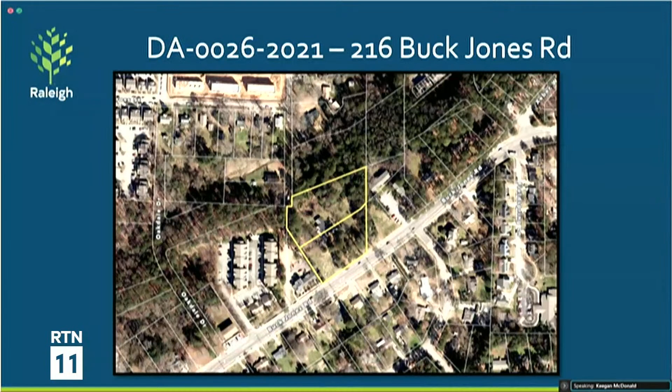This image shows the grading that will occur on the site and the exact location of where the request is being made. That red bubble is highlighting where the cross access would otherwise be required. The applicant has stated that significant grading will need to be done on the site at or near the property line. While that grading does not currently exempt them from cross access, at the end of the grading process it will be of a significant slope such to make cross access somewhat infeasible or impractical to that neighboring property, in addition to it being vacant.

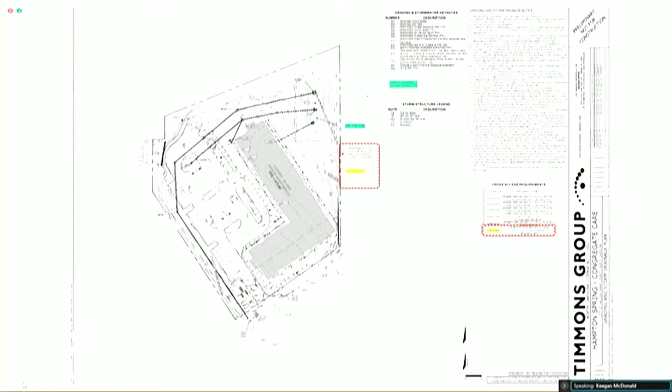I did want to note that there are a number of other properties that the subject property abuts, and each of those has a specific exemption from cross access built into the code. Those are objective exemptions that can be evaluated by staff, and they've worked closely with staff to ensure that cross access does not need to be provided to those properties where an exemption is in place. I believe they have a slide walking through each of those in case you have a question. This is just a zoomed-in version, again showing the location of where that cross access would otherwise be, and its proximity to the stormwater retention device to the northeast.

That concludes my presentation. I did want to put up the standards for the group's benefit in terms of what needs to be satisfied in order to grant the design alternate. First, that it's consistent with the intent of the section, does not increase congestion or safety issues, and does not conflict with an approved or built roadway project. Last, that it is deemed reasonable due to one of the following four reasons: either the existing physical environment creates an inability to comply, it would not meaningfully improve connectivity, it's not compatible with adjacent uses, or the burden of compliance is not reasonable given the size of the site or intensity of the development.

At this point, I'm just going to turn it over to Kevin in case he has any other commentary he'd like to add on this specific case.

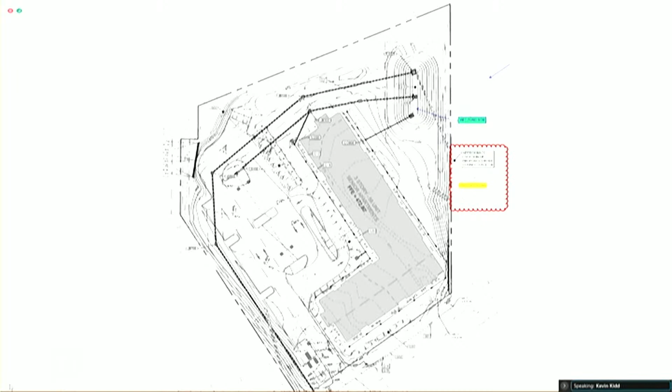Thanks, Keegan. Not much, I think you hit everything pretty well. The one thing I would add is that there is an existing shared drive that does skirt the subject property. The attorney, the developer, and the engineer are well aware, and it's on their plans. If you look at the upper left-hand corner of your screen, you'll see a driveway apron. A little further down, you'll see where they've pulled the retaining wall back - those kinds of things to take into account, so as not to inhibit access. Also of note, to the north is a future extension of roadway for the city going forward, so no access was needed there.

Keegan noted all those points. It is of note that there was an administrative site review to the east, the adjacent parcel; however, that has not come in. I'm not sure if that's been pulled or whatever, but staff did work with the developer and their representatives and agreed on all the exemptions. I'm here for any further questions should they arise.

Good afternoon. I'm Isabel Maddox. Can you hear me? Yes, we can hear you. I'm here today representing Evergreen Construction Company, and on the line today is Evergreen Vice President Tim Morgan.

Also, project engineer Patrick Barbeau of the Timmons Group is on the WebEx today and will be available for questions. If we go to the next slide, please. The subject property fronts on Buck Jones Road and backs up to the future Western Boulevard expansion. You can see the area where the future expansion of Western is envisioned. Evergreen is proposing 56 affordable senior apartments on this site, and we are requesting a design alternate to the requirement that cross access be provided to abutting sites.

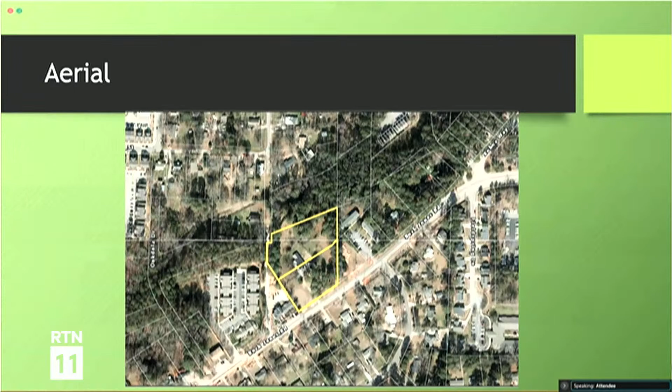Next slide, please. As both Keegan and Kevin said, we have gone through and do have exemptions to all of the properties. There are 3 to the west, 1 to the north, and 2 properties to the east. So 5 of those 6 properties we have exemptions on.

We have steep slope conditions to the west. We have the exemption for abutting a controlled access highway for the future Western Boulevard to the north. And to the northeast, we have an exemption because we abut townhouses. So the east line of this property, there's 2 properties abutting. The top half has an exemption, the bottom half does not.

And that is what we're here for today. It's a small vacant parcel. We had initially sought an exemption there because of the steep slopes. But the steep slopes, as Keegan mentioned, don't really exist on the front end, but there will need to be significant grading to get this site flat, so that we will have a steep slope condition on the back end, but that does not qualify for an exemption.

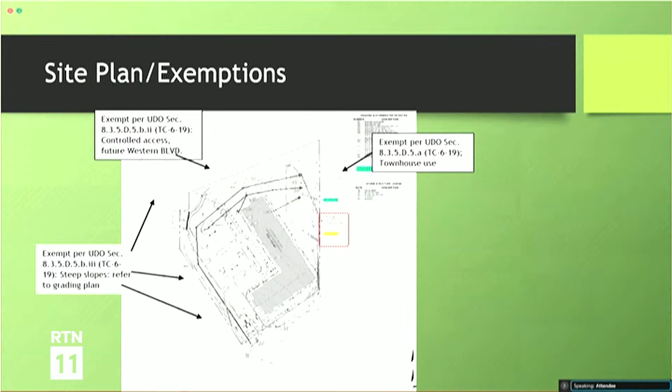So you might ask, why would we grade it in a way that would create a steep slope that didn't exist today? Next slide, please. The answer is that the goal is to get this site as flat as possible, particularly to the rear of the proposed building where an outdoor amenity area is proposed in the back.

This is, as we said, a senior affordable housing apartment building, and we want the back yard area to be flat, so it will allow many activities that might go on in an outdoor amenity area - gathering, seating, recreational activities. Having a relatively flat site is important for any constituents, but particularly so for senior residents.

The UDO really does not acknowledge that there's an exemption available when the steep slopes are created after the grading. But they will, we believe, reach a slope in excess of 25%, which is the standard for an exemption, pre-grading. We do think that the design alternate request is reasonable.

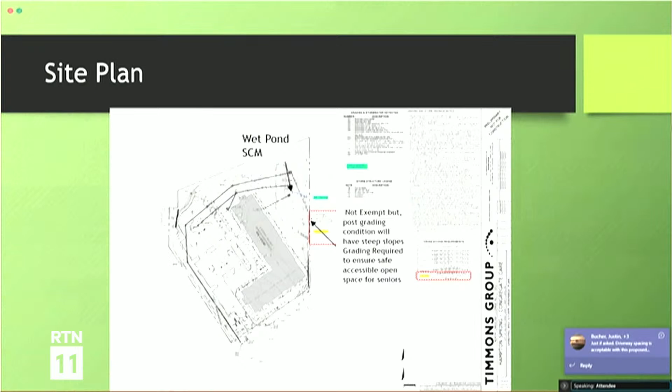If you go to the next slide, I'll go to the findings. So the first standard is that it's consistent with the intent of the ordinances. The ordinance here is to provide safe, efficient, convenient access and to reduce traffic congestion. But we say that following necessary grading, topographic challenges will make cross-access difficult.

The abutting site is vacant and cross-access would not result in any practical cross-access. Finally, the development proposes affordable senior housing, which increases the challenges of accessibility and security between the sites. So we feel that if we were to create the cross-access after construction, it would not really be safe and efficient access. It would be probably dangerous and impractical.

Second standard is the approved design alternate does not increase congestion or compromise safety. Here, we think the design alternate will increase the safety for the senior residents, and it will not increase congestion as the adjoining site is vacant.

I also had a conversation today with George Lennon, the owner of the adjoining site, and he was going to try to be on the call, but had a meeting. He didn't think he would be able to get on, and he did say please express my support for this request.

He had tried to do a townhouse development there. Had he done that, we would have an exemption, but he was not able to get it approved at this point. I'm not sure whether that's still an ongoing project or not.

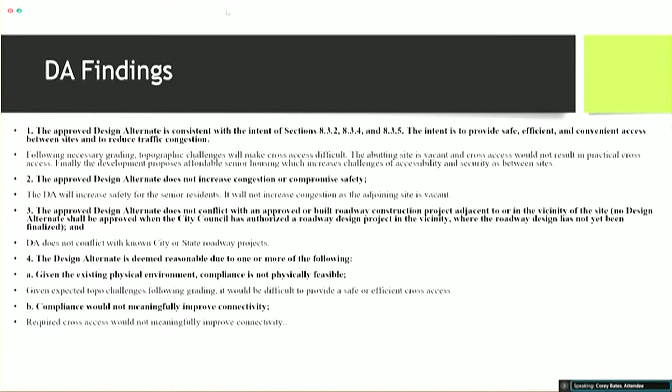Okay, well I'm happy to swear you in if you'd like to add any comments. If you don't have anything else at this time... I'll be happy to be sworn. Let me go ahead and swear you in. Mr. Lynn, do you swear or affirm that the testimony you'll provide will be the truth, the whole truth, and nothing but the truth? I do. Thank you.

Do you have anything additional at this time to add to Ms. Maddox's summary? We agree with Ms. Maddox's summary of the requirements being met. We own 200 Buck Jones Road, which is 14 apartment units with parking, and the adjacent piece at 214 Buck Jones Road, which is a triangle-shaped undeveloped vacant lot. We had considered building 4 townhomes on the site but have not pursued that project. So if it needs cross access, it has access to 200 Buck Jones through that parking lot. I see no reason that Evergreen's proposal should not be accepted by the commission.

Thank you, I appreciate that. Also, the 214 lot has street access, as you'll note on the map at the bottom left, and there's access through 200 through that parking lot. So I see no real convenience to be gained by any party by denial of this request by Evergreen. And Evergreen does good work. My son-in-law's mother was in one of their properties off Shelley Road, liked it very much, and felt it was a very well-run organization. We believe this will be an asset to the neighborhood and to the city.

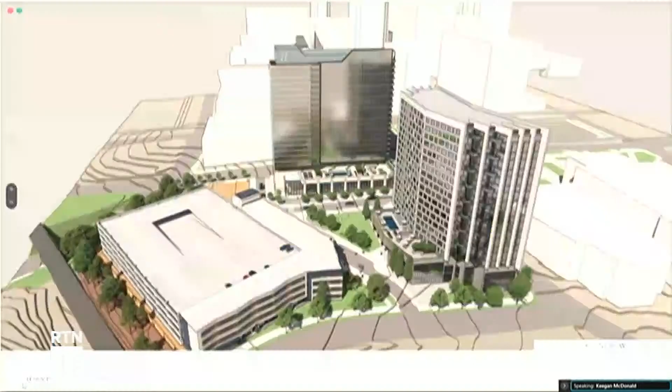Okay, hopefully everyone can see this presentation. So again, this is an administrative alternate design request related to 700 South Salisbury Street. Just a little bit of background about the broader project: located just south of the core downtown area, it's a multi-building development, as you can see from this rendering. It'll include two 20-story mixed-use buildings and also a parking structure with a 4-story residential component wrapped around, totaling about 587 apartments. There'll also be ample commercial space on the ground levels of these buildings, and then an amenity area in the center of the site and along a few of the perimeters of the buildings.

So the first component of this request is related to build-to, coming from section 348C2, related to the urban general frontage. It does require a 70% build-to along a primary street, and there are two buildings here that are part of this build-to request.

The first is Tower 2 on Lot 2, which I'll spotlight in a moment, one of the mixed-use buildings. That building will only occupy about 33% of the primary street frontage along Kindley rather than 70%. Also, the apartment building will only occupy about 49% of the primary street frontage along Kindley Street rather than the required 70%.

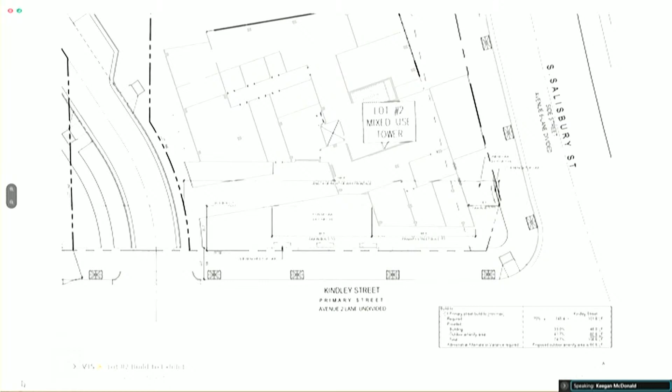Lot 3 is the apartment, and this is the same scenario: about 50% will be occupied by the building, and roughly 20% by outdoor amenity area. I wanted to show these images again because they do a decent job of showing where that outdoor amenity space will be located, along Kindley at the bottom of the picture. This is the intersection of Salisbury and Kindley, where you can see the planted area at the street, and as you move along Kindley, that outdoor amenity area fronts the south tower and the apartment building.

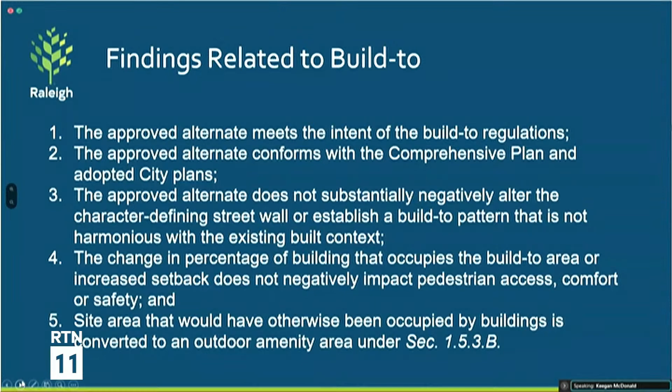These are the findings related to the build-to: one, that it meets the intent of the build-to regulations; two, that it conforms with the comp plan and adopted policies; three, that it does not substantially negatively alter the character-defining street wall or establish a build-to pattern that is not harmonious with the existing built context; four, the change in percentage of building occupying the build-to area or increased setback does not negatively impact pedestrian access, comfort, or safety; and five, the key component that area otherwise occupied by the building be converted to outdoor amenity area, which the applicant has shown. That covers the build-to request.

I'll proceed, if the commission is okay with that, through the building massing request. There are a lot of images in this section, so I'll move through them quickly since the applicant will go into more detail. The building massing request relates to two of the buildings. The requirements state there must be a 15-foot setback between the 13th and 20th stories, and between the 3rd and 7th stories, for buildings between 13 and 20 stories in height.

This is relevant to two of the buildings, the two towers. The north tower will not have any setback on the facade facing South Street, but does have other articulation and a material change, which I'll note on the exhibits coming up. The South Tower has material changes, a 3-foot step back, and a 25-foot setback from the street that they are proposing as an alternative. Tower 1, fronting South Street, is the first part of this request; Tower 2, facing Salisbury Street, is the second part.

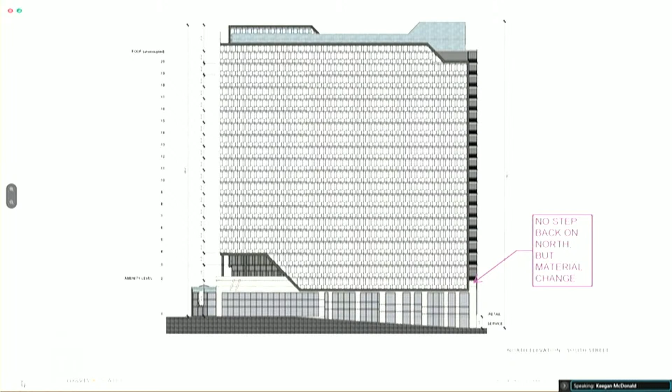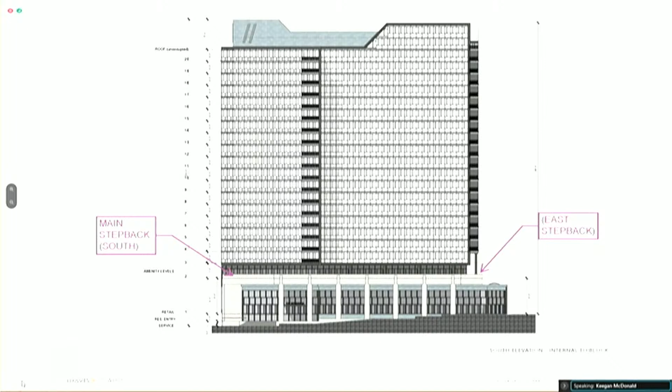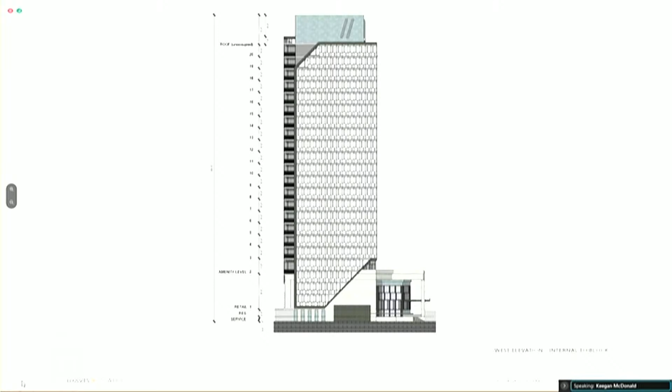These images show the step backs that exist: one on the east side, already seen along Salisbury, and also what they refer to as the main step back on the south side of the building, internal to the site, away from South Street. This image shows that step back, and another shows it from the reverse side. This is the western elevation, internal to the block, on the side opposite Salisbury, and that elevation shown in three dimensions.

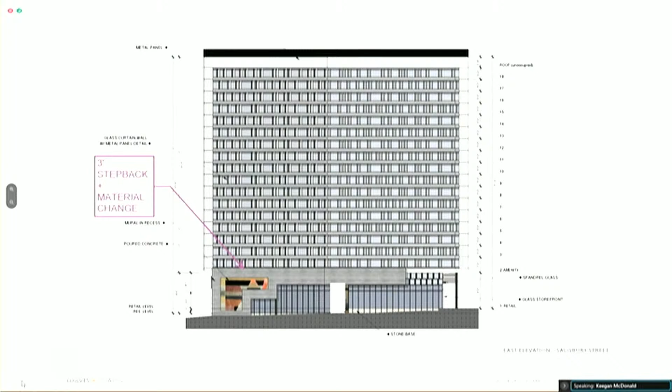This is the elevation along Salisbury Street. There is a 3-foot step back and again a material change. Here's a 3-dimensional look at that specific facade.

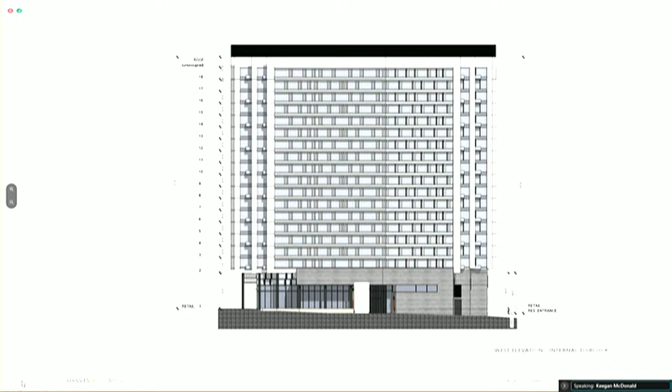Here is the opposite side, internal to the block. Here is the north elevation, also internal to the block. And also the setback, the elevation along Kindley Street.

So this is again an area where they're not proposing a setback or step back, but there is a material change on that elevation as well.

I just wanted to run through those images to show some of the other content that they provided. This is looking south along Salisbury. And this gives an internal view of the amenity space.

Just to orient again, to the left is that north tower, and to the top of the screen is that south tower, with Salisbury Street as the intervening drive between the two towers.

So for building massing, there is a separate set of findings. The first two are very similar to that for building two, that it meets the intent of the regulations and conforms with the comp plan. Three, the alternate uses a change in building materials to mimic a change in wall plane. The most substantial and durable building materials are located at the bottom floors of the building.

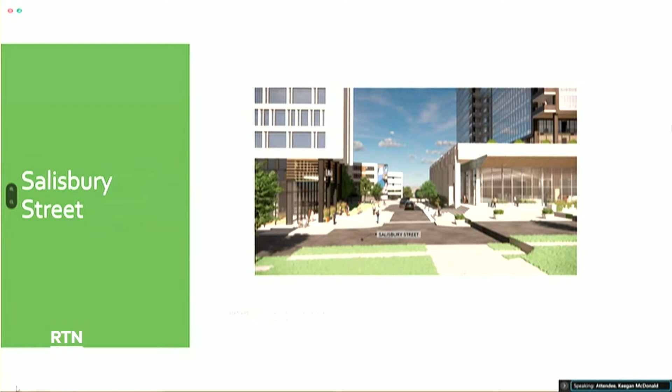Let's see. I think the slides I have for this are a little farther down. I think ours got set up opposite of staff's presentation. Maybe I'll just use this... got me a little off track, I apologize. If we could go to slide 39, this sets a perspective, but if you could just let me know when to stop. I'm sorry, the presentations are combined, so I don't have the exact number. Yeah, I think we could use that one. No, again I apologize, the previous one. That's the Kindley Street one there.

What we've tried to do is incorporate outdoor amenity areas along the public street face that would, one, define it, and also try to pull the pedestrian into the site. We have planted seat walls on both sides, or planted areas behind seat walls, which accommodate some seating. The sidewalk is wide in those areas beyond the required 14 feet.

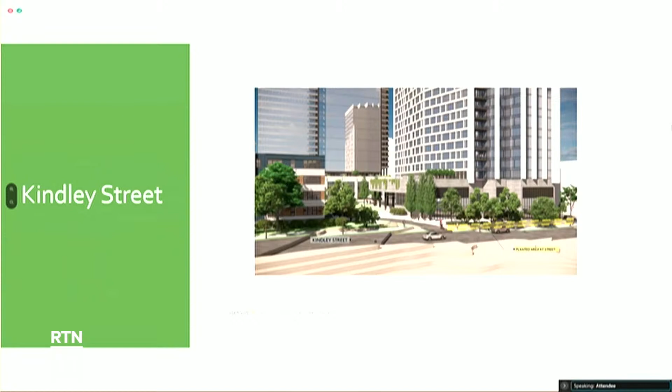And if we can go to a site plan now. Keegan, it might actually be in yours, part of the presentation. There was an aerial color rendering. Yes, that would be helpful. Is this helpful? Or... perfect, is it another slide? No, that'll work out fine.

You can see along that street face how we've incorporated those two outdoor amenity areas. The outdoor amenity area to the west of the access drive, the internal private street, is used to bring the pedestrian into our internal open space that'd be open to the public. We look at it as a gathering area, and Robert will give you more information on that during his presentation. We feel what we've tried to do here can accomplish and meet the five findings, as it defines the street face, adds amenity area for the public, and also serves as an entrance into our internal open space. I don't have any further comments.

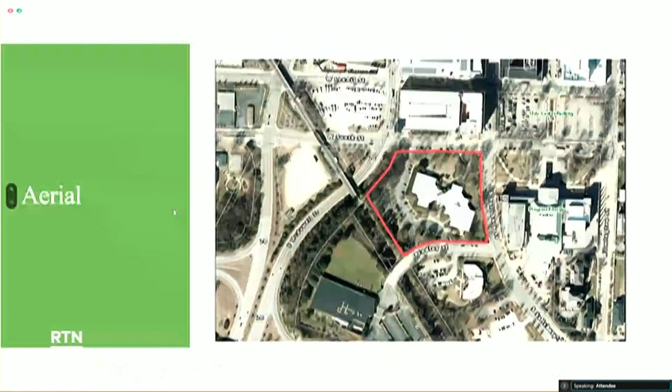Looking at this request with regard to the findings: Tower 2 will only occupy 33% of the primary street frontage along Kindley rather than 70%, and the apartment building, lot 3, will only occupy 49% rather than the required 70%. But in both cases we feel we meet the intent. We have proposed buildings within the build-to range along South Street and Salisbury Street, but the curve along Kindley makes it difficult to achieve a 70% building frontage along that route. However, we think we fill that street frontage with good pedestrian amenities.

Second, it conforms with the comprehensive plan. The policies we'd call out are placemaking, reinforcing the urban pattern, scale and design of new commercial development, pedestrian-friendly development, and ensuring pedestrian comfort and convenience. It does not substantially negatively alter the character-defining street - we believe this is consistent with building orientations along the relevant streets. We're trying to move parking away from the streets, locating the proposed building closer to the roads, and creating urban outdoor space along these streets to improve street character.

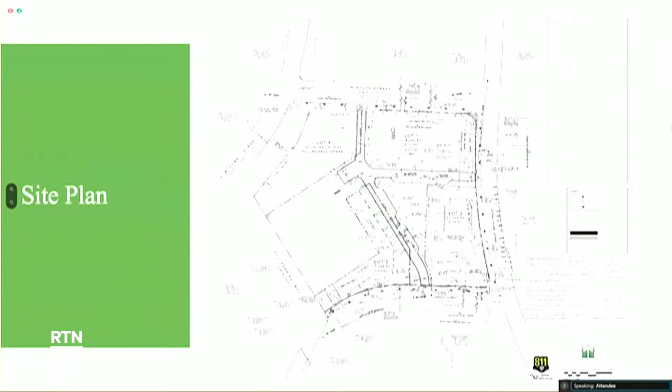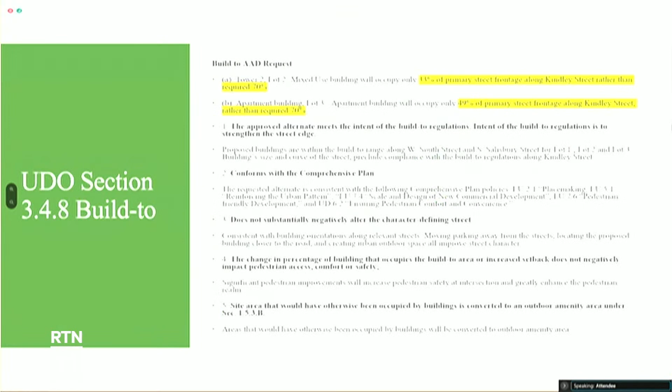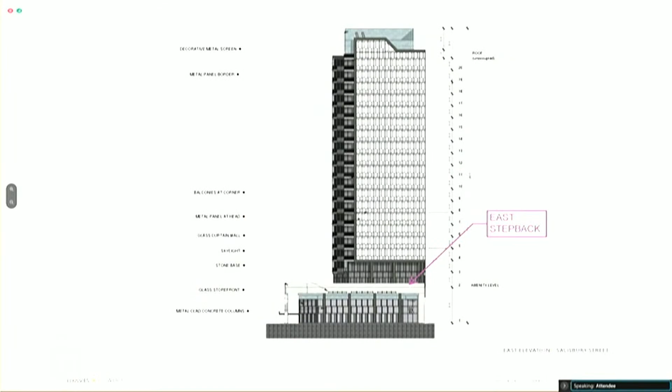Robert? Great, hi, thanks Isabel. I'm not sure where my slides are in this deck. Isabel, do you know where the beginning is? Why don't we go back to the beginning of Keegan's presentation, which had the full deck, and ask him to advance those - I think that's the best thing. There's a slide showing all of downtown with some arrows drawn on it, at the very beginning I think. Okay, great, I do know which slide you're talking about - I did not include that, but I can pull it up if you bear with me. Sorry everyone, just bear with me one moment. While you're doing that, Keegan, let me ask the commission if there's any questions for the applicant on the build-to before we get into the massing.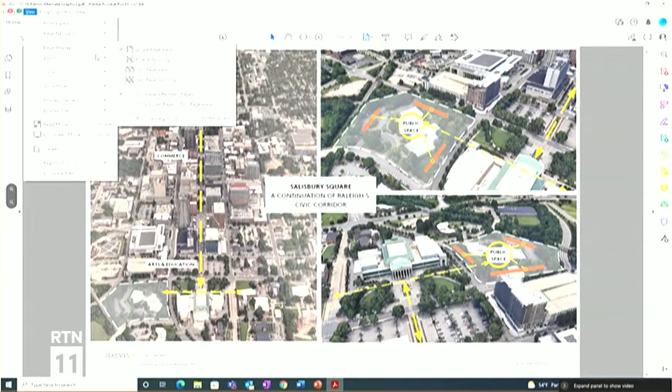Okay, I believe I have that PowerPoint that was being referred to - if that would be helpful I can pull it up now. Are you all seeing this? Yes, okay, cool. Oh, did it go away? No, it's back, okay sorry, just trying to make it full screen for everyone.

Just to reorient here, our site is at this south corner of South and Salisbury, at the edge of the original Christmas plan. The idea is that downtown Raleigh has grown around the big idea of axes connecting institutions and public space. Our project aims to continue and amplify that relationship, bringing more public space to the end of the Fayetteville Street corridor.

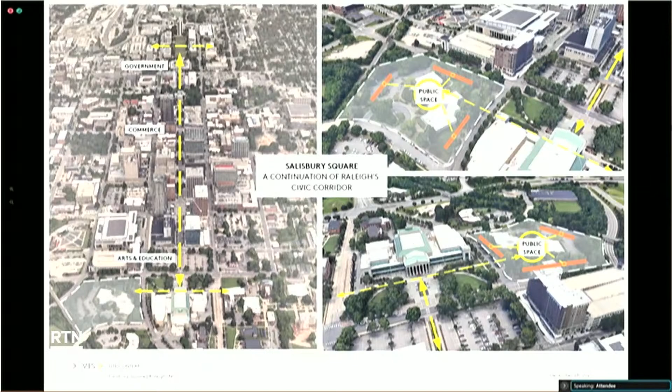The placement and orientation of the buildings makes room for open space, in effect extending the pedestrian experience of the Memorial Auditorium campus. The resulting park is intended to honor the North Carolina Association of Educators, the current owners of the site. This relationship of arts and education informs the architecture - the language of folded paper being the medium of creativity and learning.

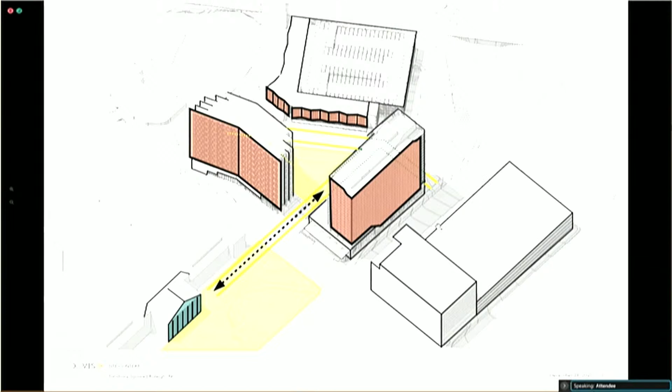So the arrangement of the site is Tower 1 with the primary retail at the ground floor, Tower 2 with secondary retail at the entrance to the site, and workforce housing wrapping the parking deck and facing Kindley Street.

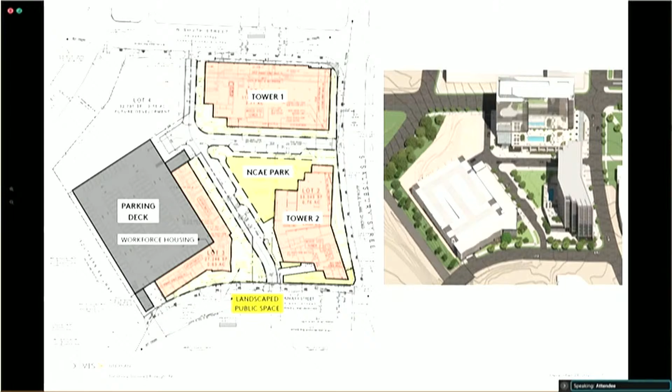This is a view of a rendering of that intended design.

With Tower 1's massing, we have multiple setbacks here on Salisbury. There's a 15-foot setback from the right-of-way, a 15-foot step back from the ground floor, and embedded in that is a 12-foot terrace at the second floor.

That's accentuated by the material change of a base that is this durable masonry material with a regular rhythm to it, which transitions to a folded plane of glass above, and then that is topped by a metal panel crown.

Other features: a 16-foot setback step back at the crown, and a 15-foot balcony slot at the corners. You can see that here off to the right and also off to the left.

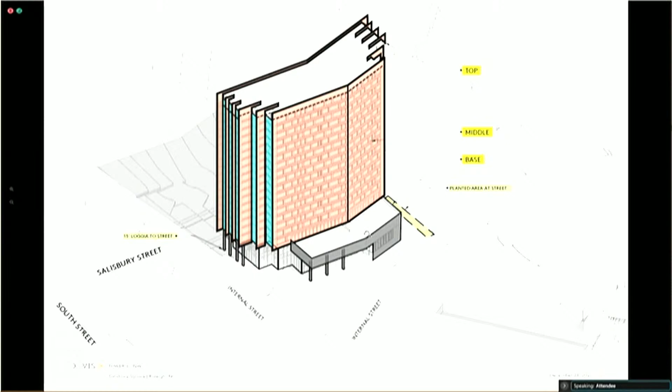And finally, the southwest axon. Again, the same logic of having a major step back here, looking out onto the park.

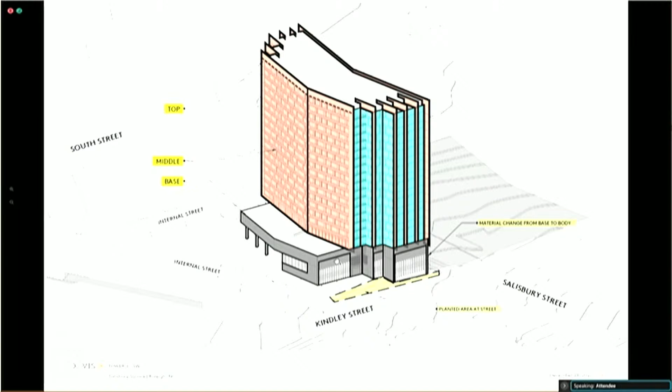So these renderings have some marks illustrating some of the setbacks and step backs and other moves that I've described. As you can see, again, 12-foot terrace, a 15-foot setback from the right-of-way, and a 15-foot step back from the ground floor up to this upper level.

For Tower 2, you could see past that, again, that sort of crown that I mentioned, and the sort of tripartite composition.

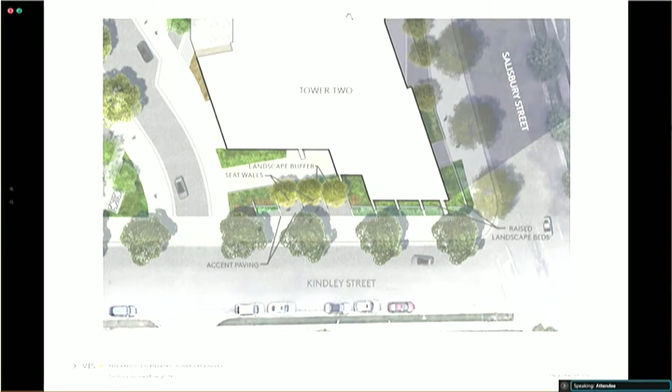Keegan, if you can go to slide 12, which goes through the findings, you may have the findings listed in your materials as well. I just wanted to go through those. I can read through them if we don't have them up on the screen.

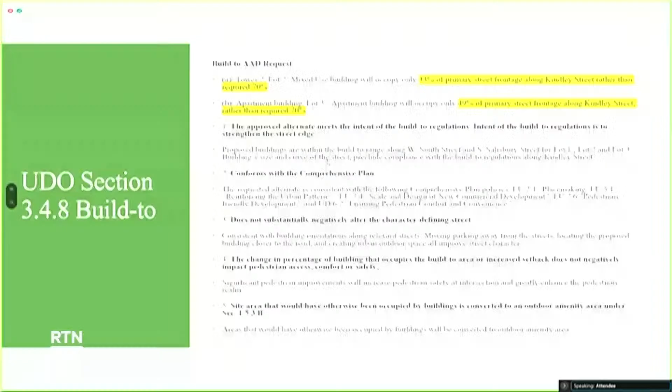The first finding is that the building meets the intent of the ordinance. The intent is to manage the impact of tall buildings located close to the street, which the build-tos require, yet we want to manage the impacts. I think we've done a great job managing those impacts, as Mr. Cox and staff have confirmed. This finding has been satisfied via multiple setbacks, step backs, pedestrian areas, and material changes, and we've gone through those in pretty good detail.

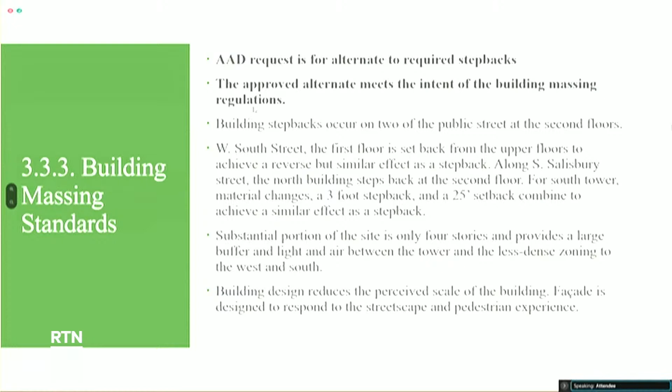The second finding is whether the requested alternate addresses the goals and policies of the comp plan. Staff confirmed that in its staff report, and I'll run through the policies we believe we conform to: placemaking, compact development, reinforcing the urban pattern, pedestrian-friendly development, integration of travel modes, bicycle and pedestrian mobility, sidewalk requirements, pedestrian and bicycle network connections, surface parking alternatives, mixed-use redevelopment, building orientation, activating the street, improving streetscape design, and management of sidewalk. I think we've hit a lot of those policies very well.

The third finding is that if the administrative alternate uses a change in building materials to mimic a change in wall plane, the most substantial and durable material should be located on the bottom floors. In this case, Mr. Cox has testified about the masonry base for Tower 1 and the concrete base for Tower 2, conforming to that finding.

The fourth finding is that if the administrative alternate proposes a setback in lieu of a step back, the resulting open space includes public areas such as seating, outdoor dining, or landscaping. We don't have the exact step backs called out in the UDO, but we do have some step backs and setbacks, and lots of public areas with seating and dining opportunities and landscaping, as you've seen from the pretty pictures and heard from both of our experts testifying.

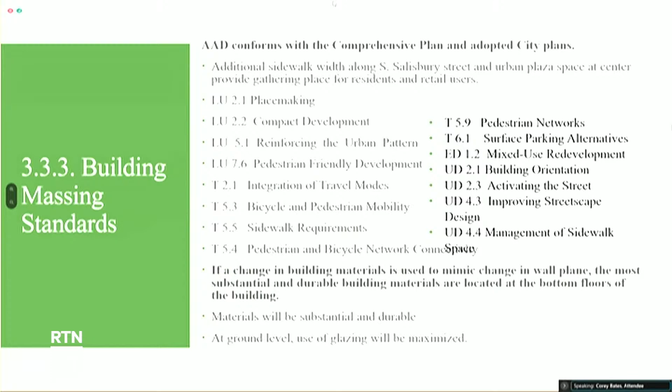Thank you, Ms. Maddox. I understand there are no other applicants signed up to speak for or against, so I'll go ahead and open it for questions you have at this time for either the building massing or the build-to. Questions for the applicant? I got a question.

Those last couple of landscape renderings that we saw were a good bit more detailed on the amenity areas, and in a couple cases a little bit different than the other plans and what was submitted. Are any elements of those more detailed plans still being adjusted or changed, or is what was presented there baked into the final design?

So yeah, those last couple of slides were the most progressed that we've gotten. It is heading in that direction, and we'll definitely be including the elements that we listed off. So I think that end of the site is looking fairly firm. I'd like to add, those were the slides I was looking for when I was talking about the build-to. So they are the latest generation and higher end design, and that is the direction we're going towards.

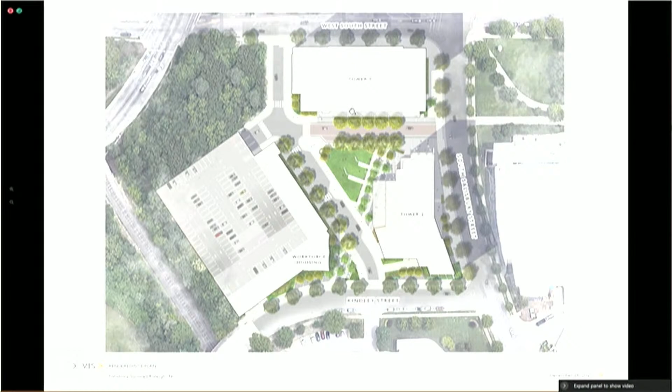Keegan, can you go back to one of the renderings showing the South Street facade? Just looking at the building massing, do we have some heights? I think code is looking for something between the 3rd and 7th floors, on both Salisbury and South Street. What levels are those? I can kind of see it on this South Street. It's like the 2nd to 3rd floor, it's set back at the 3rd floor.

Yep, sorry, what was the question? The question is the UDO talks about step backs between the 3rd and the 7th floor. Oh, for step backs, I'm wondering what level these building materials are, what your base, your middle, top is of course. The base, is that at the 2nd floor level? The gray is concrete that would be at the top of that, at the 2nd floor. So what is orange is the beginning of the 2nd floor.

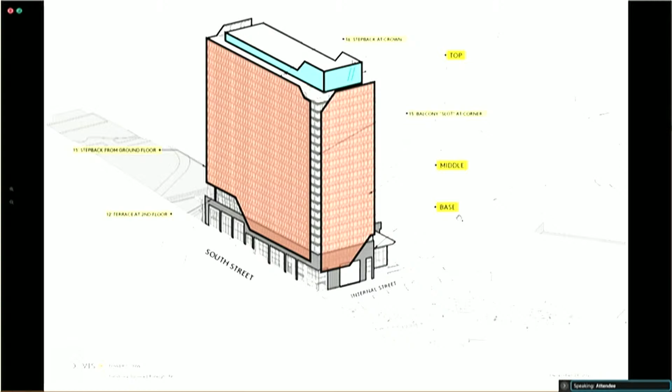Yeah, but they are. We have a lot of open space on the south side, we're essentially casting shadows on ourselves in the morning and across the back of Memorial in the afternoon. One interesting thing we've seen is that because of the size of the buildings, both about 20 stories tall, the step-back notion—coming up 3 stories and stepping back 15 feet—doesn't really change the mass of the building much. The building's quite tall and will cast a pretty long shadow no matter what. So in terms of the UDO goal of getting light and air to the street, what we've got here doesn't really have a material impact compared to what would happen if we were building by right. Correct.

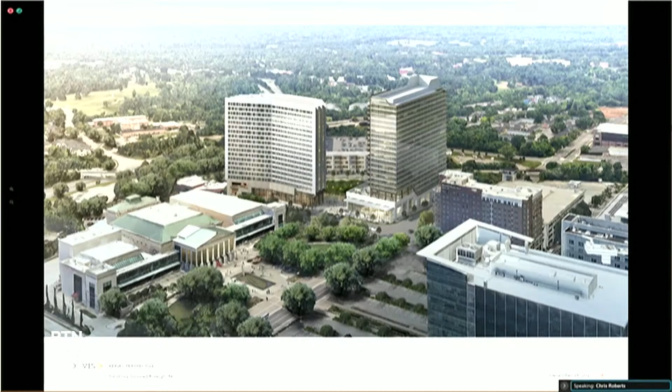Questions from the committee? Yeah, I've got one more. On South Street, I don't think I caught what the setback is from the property line along that face.

So that is hugging the right of way pretty closely there. I can answer that one. Okay, it is pulled back far enough from the right of way.

I believe it's in the range of 4 or 5 feet along South Street. The ground floor doors do not open into the right of way. We're trying to site the building. There's a radial right of way line at the intersection.

So we've been trying to get the building up in the build-tos and get it close to the right of way line when we have this curve, and that's why I think there's some chamfers on the corners of the buildings there. It is approximately 5 feet setback from the South Street right of way, and we are dedicating right of way on South Street approximately 3 to 5 feet, somewhere in that range.

Yeah, and part of that, Ken, is both that orange mass - it's sort of a reverse step back. It pops out, and of course then you can see there the storefront openings along the street are also set back from the masonry face, giving us more room at the sidewalk than we would probably otherwise have.

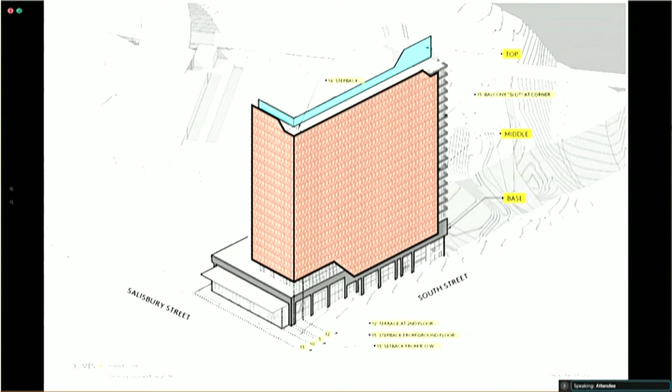Can you go ahead maybe 5 or 6 slides to the rendering where you can look at it from the... Yes, I'm happy to do that. I think it might actually be the presentation that you were running through. Right, give me one moment. Let me stop sharing and then share that screen. Okay, cool, that might help to sort of understand it a little bit better in 3D.

I think that the overall idea is the interplay of this ground floor solid and this masonry base that is interplaying with this glass folded plane, and so the visual relief comes in the dynamism of that sort of mass emerging out of the folded plane.

So you have this significant topography that goes down to about 10 feet from one end of the building to the other. So the building sort of is climbing and soaring up to the top of this corner. So it's a response to that particular condition.

And then I think in terms of scale questions, it's the 12-foot terrace. I think that interplay between that and the sidewalk and the pedestrian improvements along there would greatly make the pedestrian feel comfortable and at ease in that space.

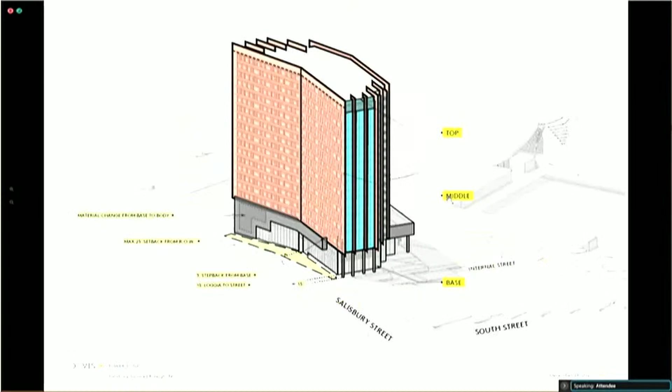There was another rendering in the slide deck looking from that northwest corner back down along South Street. Can you find that one, Keegan? Yeah, that should be the last rendering. Yeah, that's a good one.

I don't know, I'll be curious to hear what my fellow commission members have to say about this corner. Any other questions, comments?

Yeah, I just had kind of the same reaction. I think it looks nice in the renderings and everything, but when you get down to justifying it with the findings, I think it becomes a little difficult, knowing that it's pushing out instead of going in. So I agree with what you said, Chris.

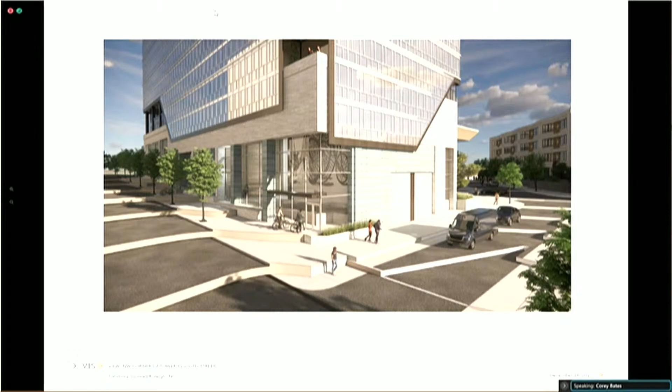Where do we want to start? So we've got a couple things—we've got the build to, which is really for two different buildings, and we also have building massing, which is for two different buildings. So we can kind of break them down.

We could do the build to all as one if people are feeling pretty comfortable. Maybe we start with just the build to—get your overall thoughts, if that's something we all feel comfortable with, or if there's one building that is bothering anybody. Just let me know your thoughts on that.

In my opinion, overall I think they did a really good job incorporating that outdoor space, or outdoor amenity space, for both of the buildings.

Yeah, I appreciate the extra detail on the updated renderings, with a lot of extra elements there to make that more of an amenity space. And yes, Salisbury Street is intuitively the primary street, and all of those streets are curved except for South Street. So I think the build to makes sense.

Yeah, agreed. I think those final site plans that Keegan found answered a lot of the questions I had about what those amenity areas were, to make up the difference for the build to. So I'm in agreement with both of the build to requests for both towers, or both buildings.

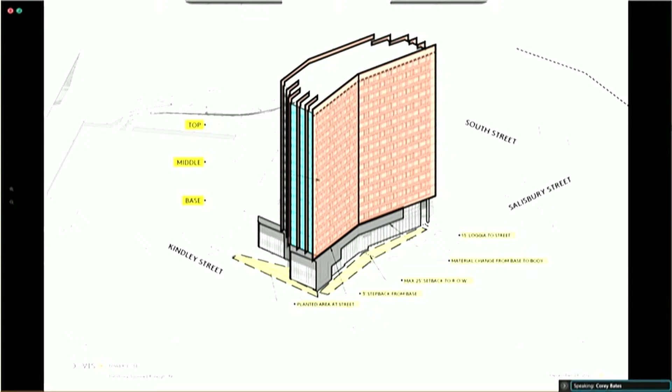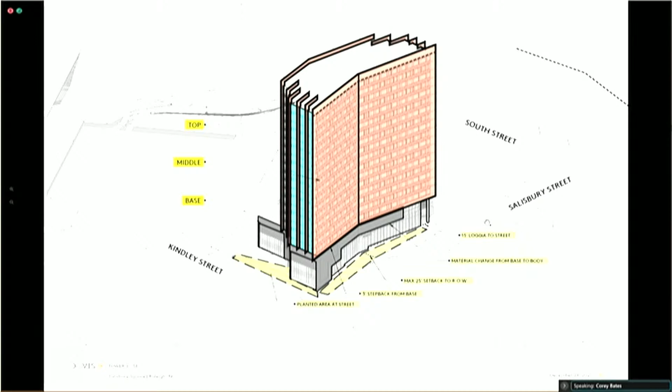Get the findings for... Yes, give me one moment. Let me see if they're in this deck, and if not, I can pull them up.

So the approved alternate and number 2 conform with city plan policies. Justify that. UD 2.1. Mm-hmm, 2.3.

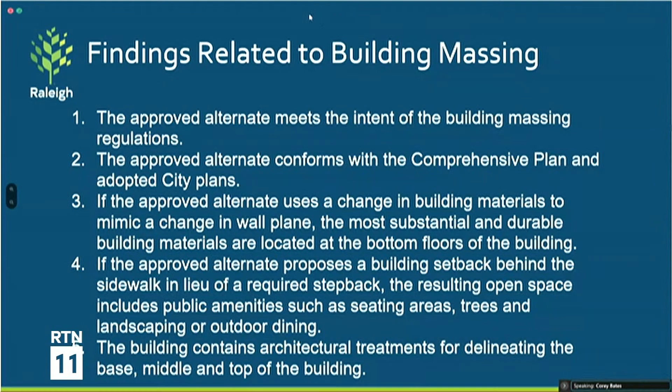Okay, so that just leaves, really, what is that called? Tower 1, I guess, on the South Street side.

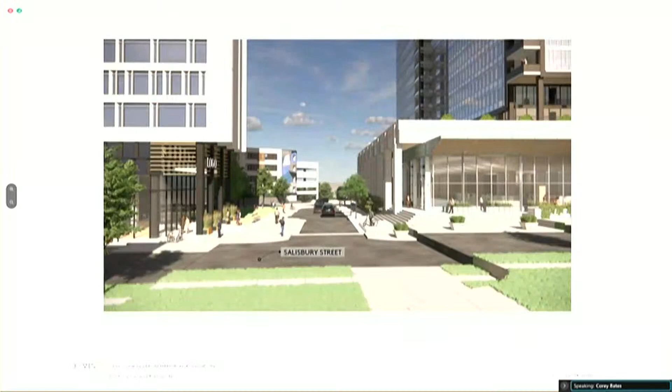Sounds like there's some questions. I don't know if the votes are there quite yet. I would suggest that we hold off till our next regular meeting. It's just my suggestion on that.

Mr. Chair. Yes, ma'am. I think it would be helpful to get any kind of concrete guidance, and I would like Robert Cox's input on this because he's going to have to tweak anything that needs to be changed, which I don't think is a minimal tweak.

Right, and actually, if you don't mind pulling that image back up, that'd be helpful. This is a hard one. This is one of the hardest ones I've had, schematically.

I think it is because it does appear to be so far along, but I think what we're having is just a hard time finding a way to meet the intent. If I could, there was a comment—I apologize, I don't recall who made it—but somebody mentioned that we were able to do it on the south side, but not on the north side.

I think it's important to keep in mind that the reason it's on the south side is because we could, right? The south side is where the swimming pool is, it's where the amenity deck is for the residents and those kinds of things.

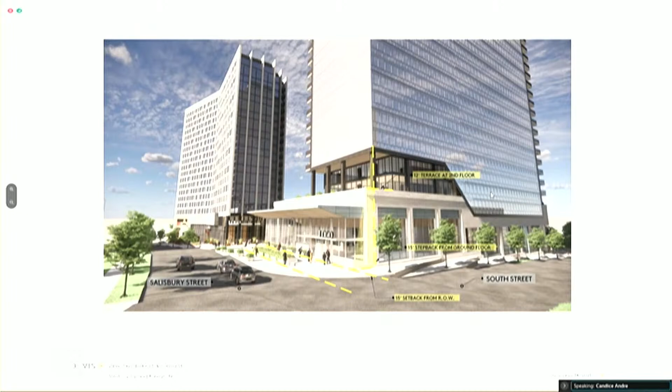Correct. Yeah, you can see it in the view from the northwest. If you look down on it, you can see it's just about a foot on that side, on the South Street. There you go. Ah, there you go. Okay.

That pretty much shows the facade, though, the whole facade. It's pretty straight up. Yeah. And this is not as recent as the one you were looking at just a moment ago.

If you peel back some of that curtain wall, some or all of it, would that do anything to get you there? Like I said, drag the diagonal further to the right. Yeah.

Yeah, it's hard to say. I'm empathetic because I don't want to design it, but I don't want to just do something because it's a code-required thing, right? You want it to look cool when it's a finished product. So I don't know what it'll look like if it gets pulled back farther. I think it'd be worth looking at.

Could that piece that's a foot deep, could it be a little more than that? Does that work with your building plan? I don't know.

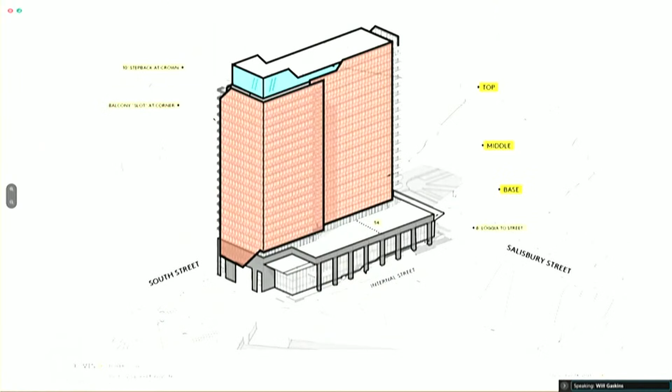I don't know how the rest of my colleagues would feel about this, but I think a material change that would break up the single plane could make some sense. Something that might speak to the balcony slot at the corner. Yeah, maybe you see some of that same kind of facade that you have down below, at the 2nd floor, come up.

I don't want to design it, but just trying to figure out a way to. It's a sticky situation because I don't want to make a building that's totally cool into something less, because trying to meet the intent of the code, but trying to figure out a way to kind of do both, make it cool and... I don't know if that gives you enough guidance, Corey.

I agree. I mean, I actually like the diagonal piece. It's just above it.

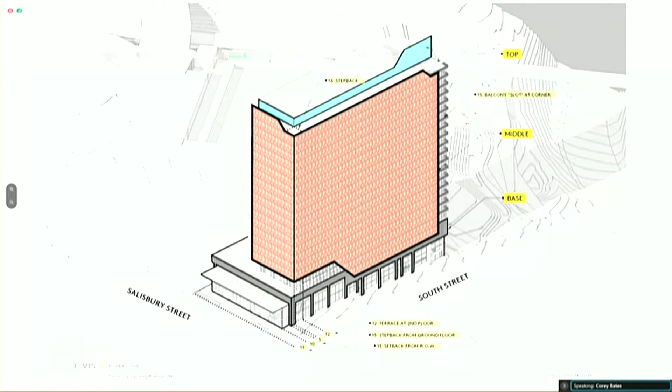Well, let me ask you first, Keegan - would we have enough time to get the materials and stuff back and get it into the system if it was 2 weeks out, or would we push it off? I don't believe 2 weeks is feasible, just because tomorrow is essentially our internal deadline to have materials reviewed and uploaded to BoardDocs. But the second meeting in February is certainly doable.

Yeah, I think the first meeting is really pretty jam-packed. So, okay, everybody's on board - let's ask Ms. Maddox if that would be an acceptable solution for you all.

17th of February. We're certainly disappointed not to get approval tonight, but it doesn't sound like we have a lot of options in terms of other meeting dates. Certainly, we'd love to get to the first meeting in February if we could. And I would want to just ask the general question: do we think the board could see their way clear to approving this with the material change, so that we don't have a structural change at this point?